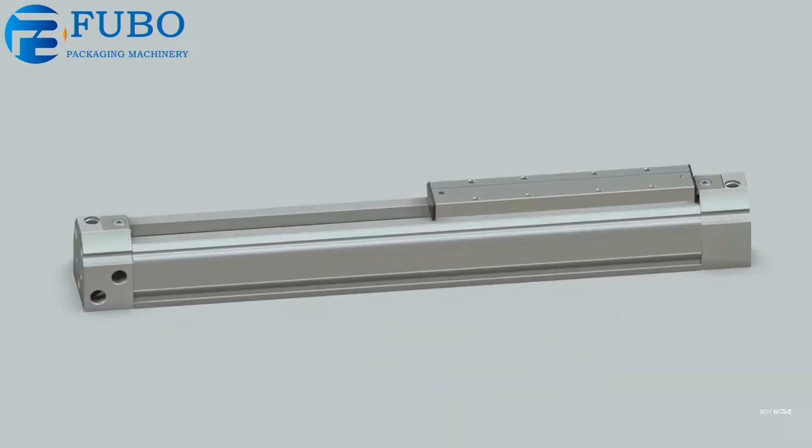Now, let's look at the internal structure and operating principle of the rodless cylinder in animation. First, let's look at the internal structure of the rodless cylinder.

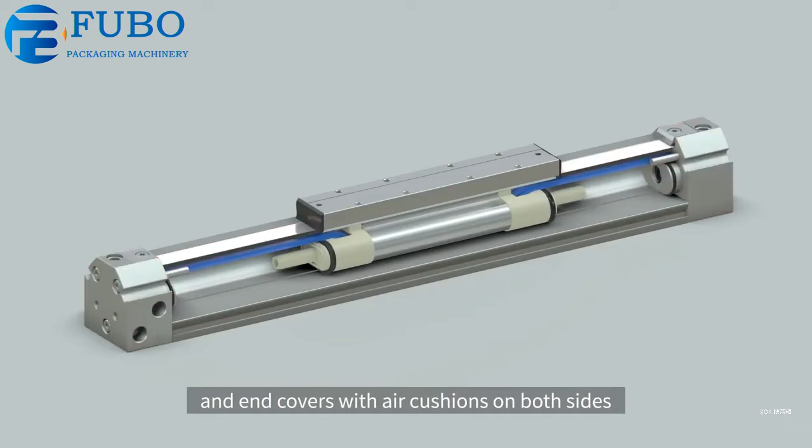When only the typical parts are explained, the rodless cylinder has a cylinder tube, a shuttle, a piston, an inner sealing band, an outer steel band, and end covers with air cushions on both sides. The description on the cylinder tube and the end covers on both sides can be found in the previously uploaded pneumatic cylinder-related video. Then, let's take a look at each part of the rodless cylinder.

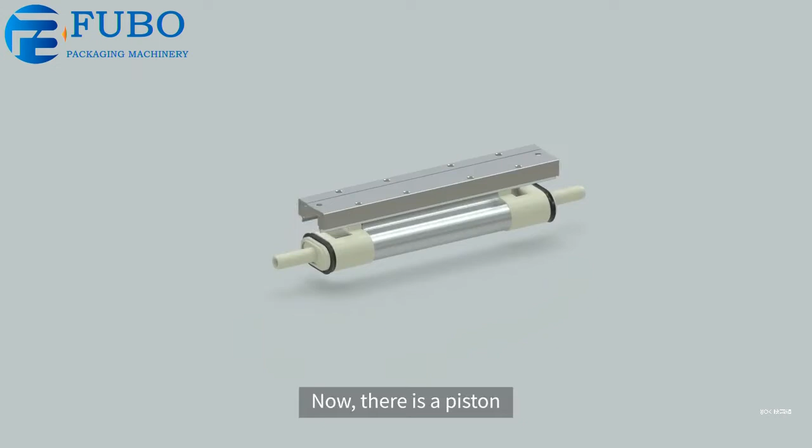Now, there is a piston. The piston makes a linear movement on both sides by the compressed air supplied. The shuttle, which rests on the piston, moves with the piston, supporting the load mounted on it.

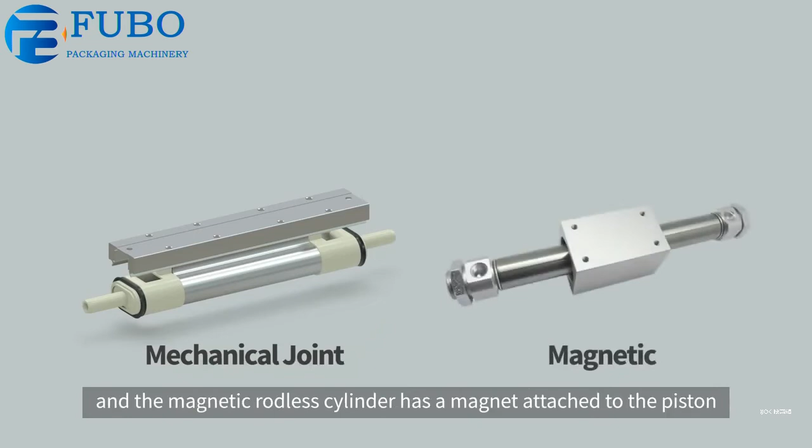The piston and the shuttle of the rodless cylinder can be connected in various ways. Like this cylinder, the piston and the shuttle are directly connected together. And the magnetic rodless cylinder has a magnet attached to the piston, and the shuttle with the structure in which the shuttle is driven by magnetism when the piston moves.

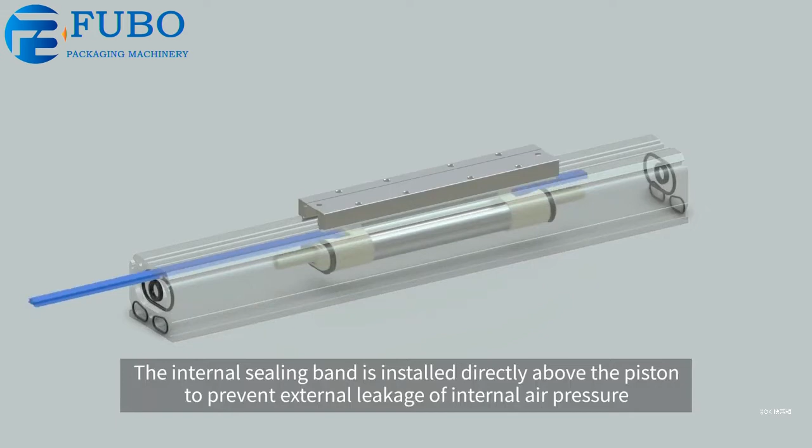The tube is then inserted between the piston and the shuttle. The internal sealing band is installed directly above the piston to prevent external leakage of internal air pressure. As its material, an elastic and durable material, such as polyurethane, is mainly used.

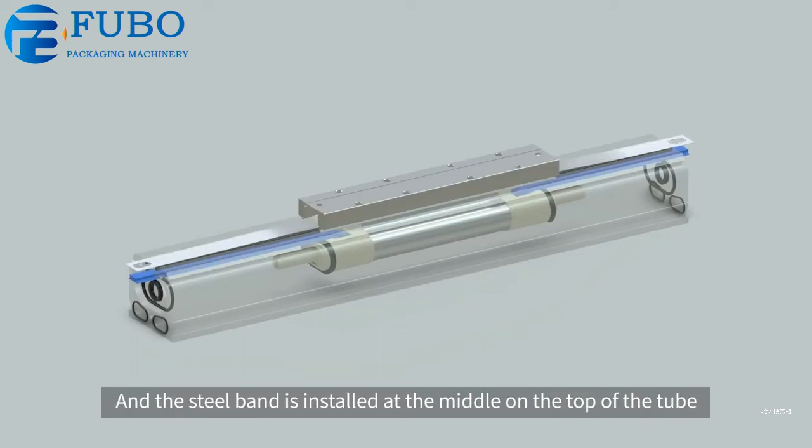Above that, a magnet mounted on the top of the tube helps the steel band stay in close contact with the tube. And the steel band is installed at the middle on the top of the tube. The steel band plays a role in preventing dust or dirt from entering the inside by blocking holes in the center of the tube. The shuttle end caps prevent dust from entering the shuttle from both sides and flattens the steel band.

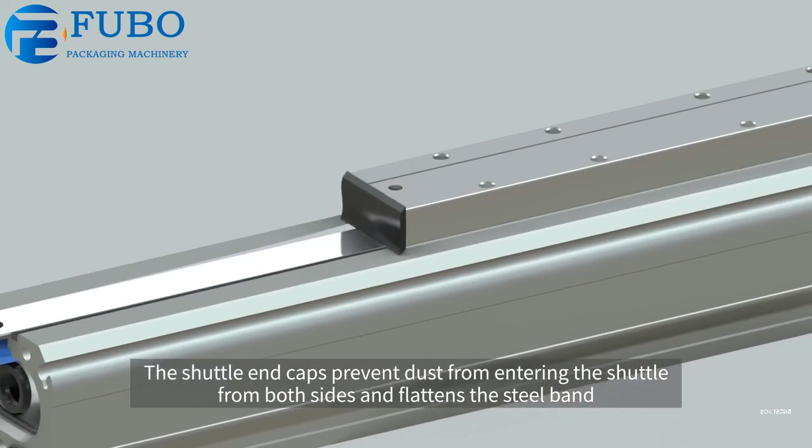The end covers are fitted on both ends, and, finally, the steel band fixing bracket screws are tightened to prevent the band from being deviated.

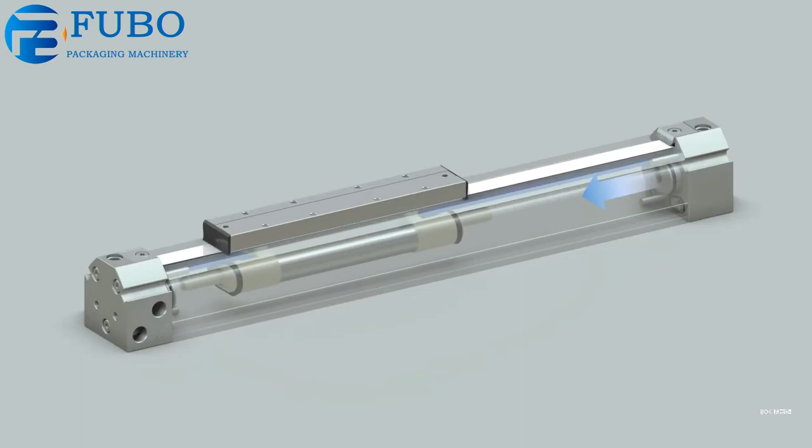So let's see how the rodless cylinder actually works. When compressed air enters, the piston and the shuttle move together, while the ordinary cylinder pushes or pulls objects when the rod comes out. The rodless cylinder makes the piston and a conveying object move together.

In this video, we've looked at the internal structure, components, and operation principle of the rodless cylinder.